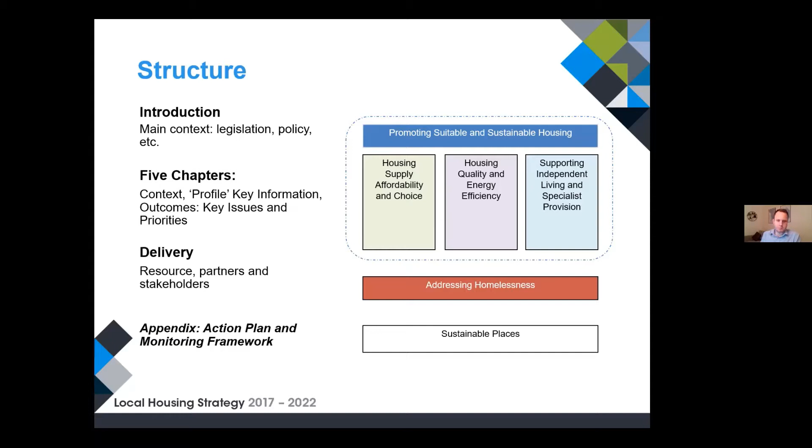But all of that is underpinned by an action plan and framework which details a lot of the actions we have to do, and I think this sets about 98 actions on the local housing strategy across those different chapters.

And there is a requirement, just like we have within the local housing strategy, there is a requirement within the local development plan to ensure there's enough provision for housing over the next 10, 15 years, based on some of the analysis we do around how many people we think want to live in South Lanarkshire and what type of people are going to live there, what type of housing they need as well. And so that's all things that we do.

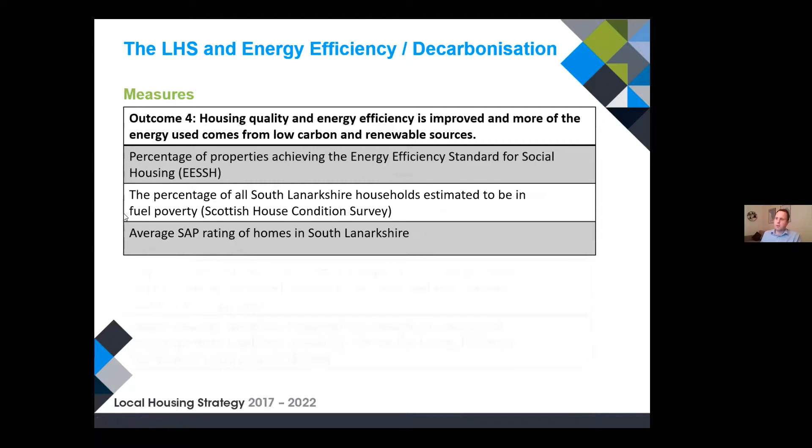So how have we intended to improve these things over the last few years? One thing we want to do with the private sector is secure maximum external funding possible to promote home energy efficiency improvements. You may have heard of the Energy Efficient Scotland Area-Based Schemes Programme - that's central government money from the Scottish Government that can be used by homeowners and private landlords to invest in their own properties. It's essentially match funding.

So if you want to put new internal insulation in, you'll see schemes that say you can do that, but they'll give you £1,000 towards it, for example. Usually you need to pay about 50%, or they'll pay a bit more for different things in different areas depending on the issues. There's a range of schemes out there, and we try to promote their availability to homeowners and private landlords.

We also work with partners to promote energy supplier comparison and switching as a means of securing best value and minimising fuel costs. We have a fuel poverty subgroup that meets every couple of months, with partners from all the advice agencies you'd expect - Home Energy Scotland, our own Money Matters advice service funded through the council, and the Citizens Advice Bureau. We sit down with them to understand the problems people are bringing to them, and make sure those people are aware of the potential solutions.

So whether it's short-term energy vouchers, which is a big thing at the moment with the increase in bills, or longer-term investment in their property, we make sure they're pointed in the right direction and work with them to allow those people to try and get out of any issues or fuel poverty risk as well.

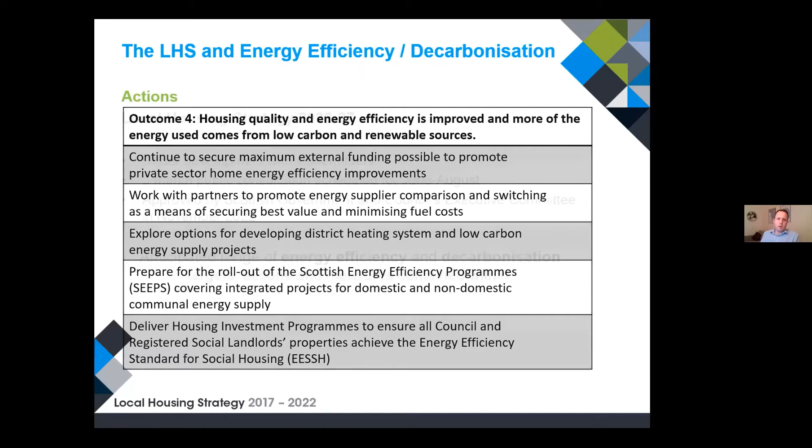The eagle-eyed of you will probably notice that it was the 2017 to 22 local housing strategy. Obviously we're sitting in 22 just now, so it's a statutory requirement that we produce another one for the next 5 years. A lot of the work I've touched upon is still underway. We had a nasty thing called COVID in the way, which put a delay on a lot of the projects we were taking forward, but there's a lot of good work done over the last 5 years, and now we need to write a new strategy for the next 5 years and really up the game in terms of energy efficiency and decarbonisation.

Targets have all changed, and I'll touch upon them in a second, but there's a lot of new technology out there, and a lot of new opportunities for the council and for owners of buildings right across South Lanarkshire. We're keen to try and get as much of that into the new strategy as possible.

So we're currently working with stakeholders at the moment, all the partners I listed at the start of the presentation, to really put a skeleton together of what this new strategy would look like.

And then it'll come to yourselves for a 3-month public consultation in June and August. I'd be more than happy, or one of my colleagues will, to come along to one of these meetings to talk through the proposed strategy and get your views on what you think would be really important to include. Then we'll send it to the Scottish Government for approval, and also to the Council's Executive Committee later in the year for final sign-off.

And then that'll allow us to work ahead against all these new targets and actions for the next 5 years. But absolutely, the chapter on energy efficiency and decarbonisation is, as you can imagine, going to ramp up quite significantly.

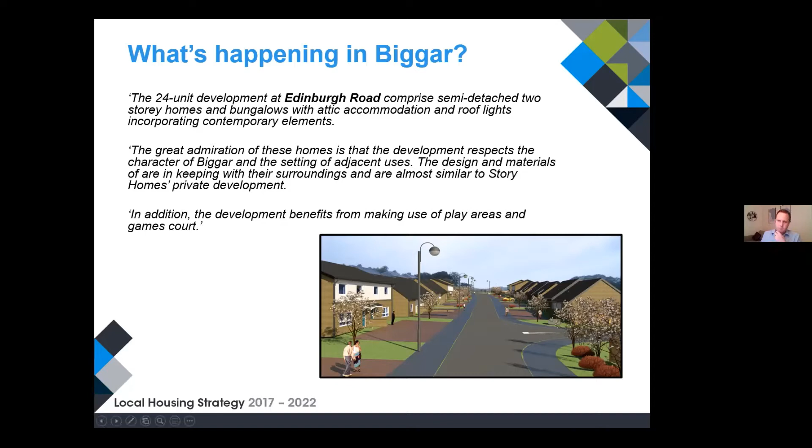The kitchens are all designed to specification for wheelchair turning space available, that kind of stuff as well. And we've got the semi-detached properties with car parking spaces available, geared up for EV charging ports as well, should the tenant need to put that in. So we've tried to make them as future-proof and energy efficient as possible, as much as our grant funding would allow. The feedback from tenants is they absolutely love them, so it's really pleasing to see that having followed that project from the start.

I think Janet touched upon it as well. Coming up in Biggar, we have Clydesdale Housing Association who've submitted plans within our strategic housing investment plan, essentially a 5-year rolling plan of where we think housing is going to be built over the next 5 to 10 years. They're planning on building a small number of properties in Biggar, and they've looked to draw down grant funding from the Scottish Government next year, ready for building for 2023.

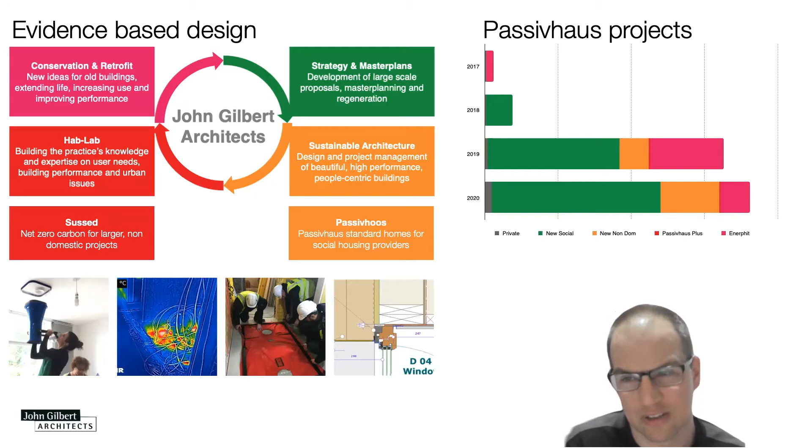So what I'm going to talk about very briefly—and it might be that Jonathan has covered some of this—is some of those principles, and then some projects and some nice pictures, because it's quite late at night. Let's see some pictures. That's what we're here for as architects, right?

So that's the plan. Just to finish off what we've been doing, we've got a partnership with Stewart and Shields Builders, doing design and build. They're building it and we're trying to get a solid cost basis, so you can give cost certainty to social housing landlords, which is really important, while building all of them to Passive House.

We've also got a joint venture with another architect, Holmes Miller, and Miller Sustainability, looking at big non-domestic buildings. So when I talk through these projects and ideas, that's within a partnership of maybe 5 or 6 companies all trying to do the same thing and help each other, which is quite an interesting thing—you learn a lot from that.

I'm not going to go through this in detail, Janet, I can send you the slides after. But COP was here last year. Scotland's meant to be zero carbon by 2045—that's a legally binding target. The UK is meant to be zero carbon by 2050—that's also legally binding.

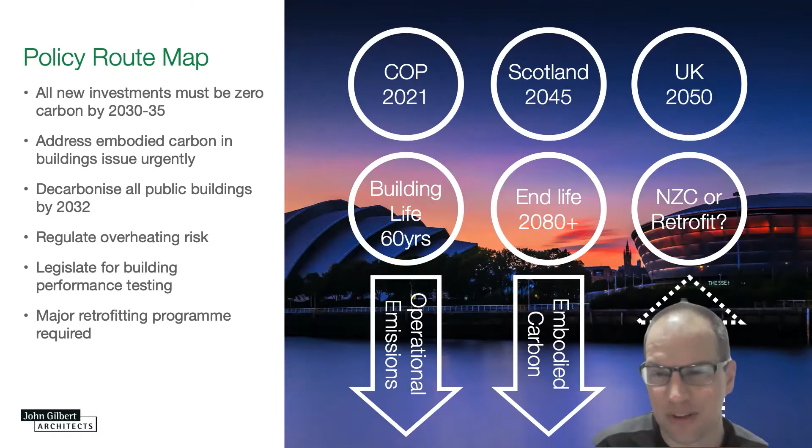And across the UK, we're using a lot more energy than we can generate in renewables.

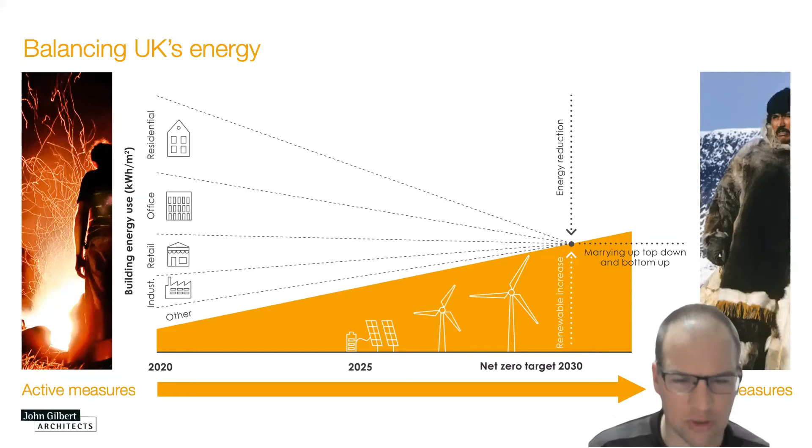So if, as a society, we want to become net zero carbon and meet all these targets, then what we've got to do is reduce the amount of energy we're using in our buildings and maximize the amount of renewables. Somewhere in the middle there's a spot where we can generate enough renewable energy and have reduced our energy down. That spot means the majority of our buildings have to be somewhere close to the passive house standard, to get to that spot. That's maybe not industrial, but certainly the residential and office.

The other thing I talked briefly about is embodied carbon. Embodied carbon is the carbon used to build the buildings we've got, and that carbon is used before the building is open. So all of your embodied carbon in your bricks, your concrete, your steel - the day the building opens, you've already spent that carbon. Then the operational carbon is everything that comes from the heating. So a typical building regulations house, on the left-hand side, 67% of it is operational carbon - the running, the energy from heating and hot water. Only 21% of it is embodied carbon, so it's not a very big fraction.

If you go to something like a passive house, the amount of carbon is much smaller, but only 23% of it is for the heating and hot water. 50%, or more than 50%, 60% in some cases, is actually building the buildings. So you've spent all that carbon before anyone's actually moved in, which becomes a really big issue. Embodied carbon is one of the big blind spots of the construction industry because no one's measuring it, no one's monitoring it, there's no regulations for it.

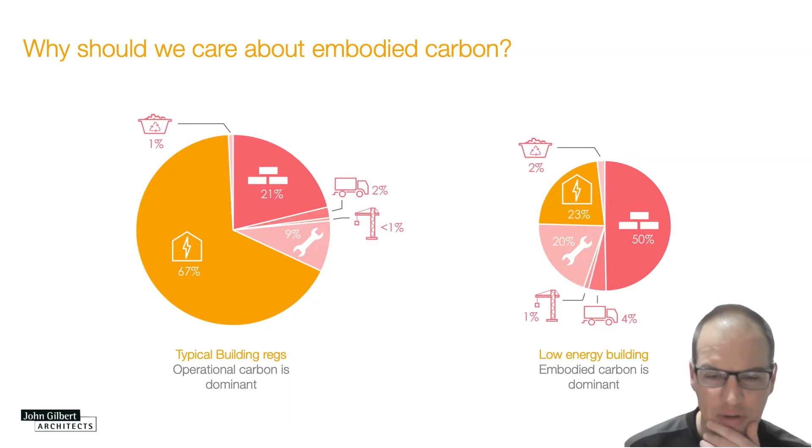So that gives you a bit about the policy, a bit about the ideas. How do we achieve these net zero carbon houses? Well, we've got to reduce our operational energy. We've got to insulate things. We've got to make things more airtight. We've got to put some efficient heating in.

And Jonathan was talking about heat pumps - heat pumps, electric, that kind of thing. Got to be careful that by doing these two things, we don't create a whole load of health issues by sealing buildings up. So we've got to get some ventilation in there - that's really important. Ventilation can be a massive loss of energy. Some building regs houses we've looked at, maybe 35% of the heat has been lost through infiltration and the lack of airtightness in the building. So you're getting ventilation, but the cost of it is really a lot of energy, and that's a real problem.

If you've got a really efficient heating system and you reduce things down in a passive house, then actually your hot water demand becomes the biggest demand. And so getting good hot water is important.

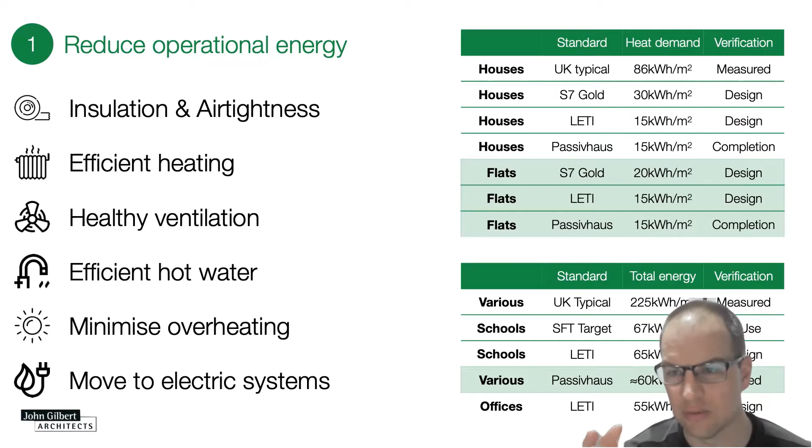Scotland and the UK is heating up, and if you've got well-insulated buildings, then you've got a risk of overheating. So you've got to make sure you design for that and think about it. And there's a move to electric systems. I'm not going to talk through all the stuff on the right-hand side, but the upshot of all of that is that all of the research on where we need to be to meet our net zero carbon targets comes down to being around the same targets as passive house, give or take. That's where the UK's building stock has got to be.

So what is passive house? What does it do? It does all these things. Every single thing on here is backed up by 3 or 4 different academic studies showing that passive house buildings do better than building regulations buildings in all of these criteria. The big one for me is around fuel poverty - eliminating fuel poverty, which leads to low rent arrears, which leads to social housing tenants having more money in their pocket.

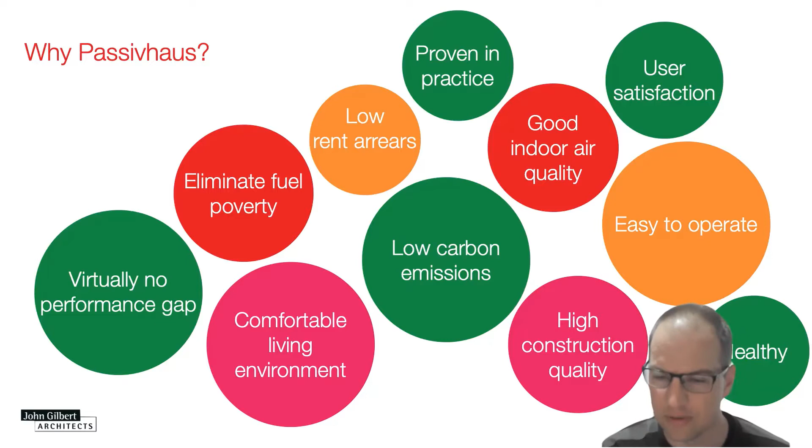And I think that's a really important social aspiration. I'm going to talk a lot about tech stuff, but the idea that people are choosing between things - I've got a real bee in my bonnet about the fact that fuel poverty is a political issue. It's not a technical issue. We can technically build houses that mean people don't need to be in fuel poverty, and we're not. That's a political issue to my mind. But anyway - comfortable living environment, low carbon emissions, construction quality, and so on.

I'll say very quickly on this. Passive house is three things. It's a certified building performance standard, and behind that, there's a calculation to work out how much energy your building is using. You don't need to meet the performance standard in order to use the calculation.

We use the calculation on a wide range of buildings to see what the energy performance is, and it's often very close to what the calculation suggests, even for non-passive house buildings, which is interesting. With EPCs, we often find a gap between what that predicts and what it actually is, but we find it much closer in the passive house calculation. And then you can get certified components, like passive house windows, and I'm a passive house person, so that's great.

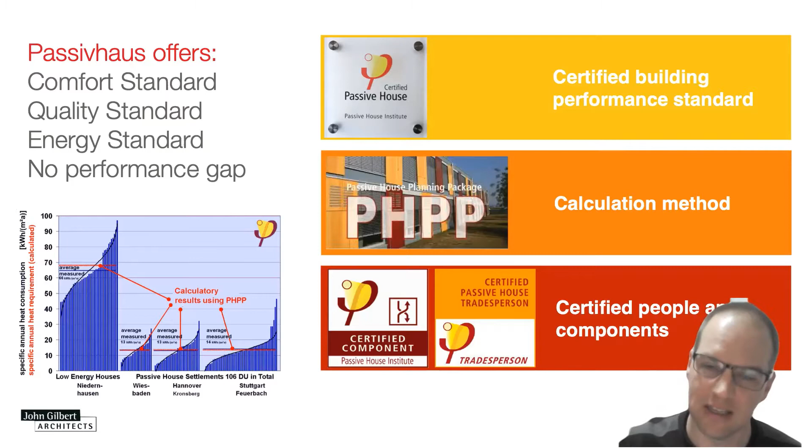That can help you get to the certified building standard, and you could do it for a whole range of buildings. So we're working on all of these types of buildings at the moment. Housing, as I say, we've done social housing, there's private housing, we've done private housing.

Schools, we're looking at six schools across the UK to passive house standard. Retrofit, so we're retrofitting a tenement, a traditional sandstone tenement in Glasgow to passive house standards at the moment. It might not be the way that we do all the tenements, it's really complicated, but it might teach us some things that we can put into other projects. We're doing a swimming pool in Blairgowrie and offices and other, a rowing club and other different things. It's quite good.

Passive house is basically about human comfort, about how people perceive comfort. I've got a little bit of spiel about this, but time's pretty short, so I'm not going to go through it. But if you want that, I'm quite happy to. There's videos on our website and things like that. But it's all about how your body is comfortable at as low a room temperature as possible, and how we get that energy efficiency from that. It's about being comfortable.

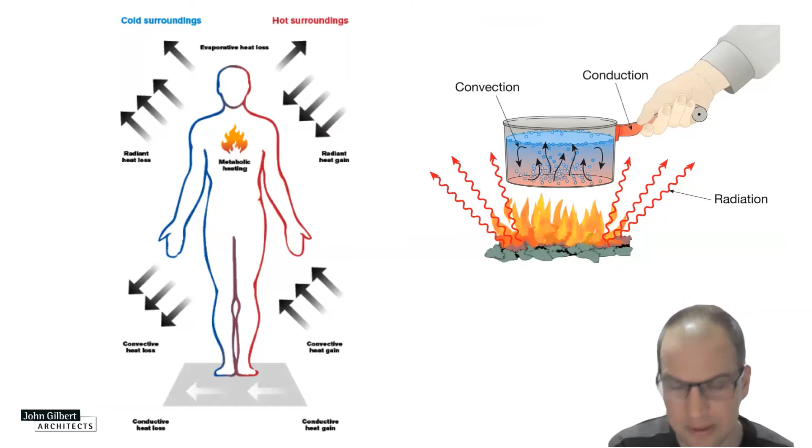And it's about building physics. This is what it means for a building: you have a lot of insulation, which you would expect, but you also have triple glazed windows, not just for the energy side of things, but they also help people feel comfortable in a room. A single glazed window makes you feel cold, or can make you feel cold. A triple glazed window can keep you warm.

It means that if you have all the surfaces in a room at the same temperature, then people will be happier with a lower air temperature, which is quite interesting. So passive houses are typically heated to 0.5 or 1 degree cooler than a building regs house, but people feel more comfortable, which is an interesting thing. Triple glazing,

we're looking at the sun. We're trying to design for passive solar gain, but trying not to get it to overheat in the summer. We're making the whole building airtight, so we're not getting the drafts. Because we made it airtight, we're going to put in a good ventilation system, and that ventilation system is going to recover the heat from the stale outgoing air and put that heat into the fresh incoming air. So you've always got fresh air coming in, but you're keeping the heat in the house.

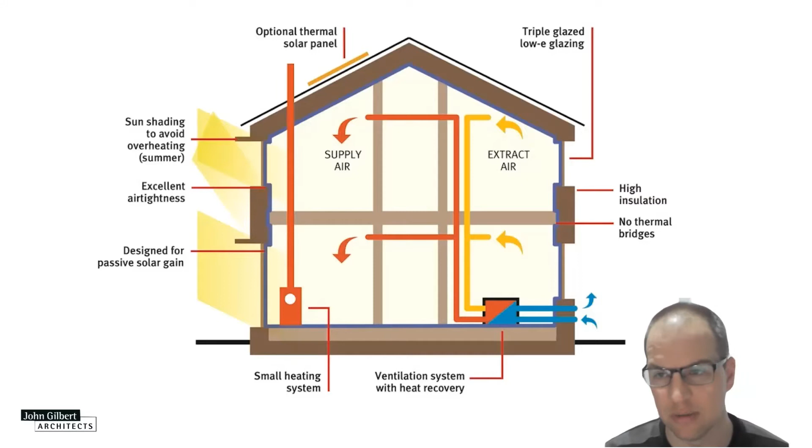And if you do all that in Scotland, you only need a really small heating system to keep all that going. The big issue for the heating system, frankly, is hot water. Where do you get your hot water from? Most of our heating systems are sized for the hot water demand and not for the heating demand, which is an interesting thing.

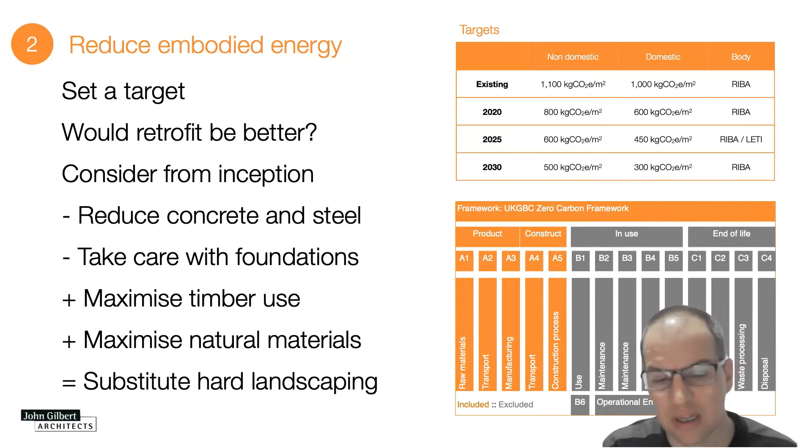Once you've reduced your operational energy, thinking about embodied energy, thinking about retrofitting, thinking about reducing concrete, reducing steel, maximizing timber, looking at local materials and things like that.

This gives us an idea of how we calculate and think about that. We look at big volume things, like the structure. We look at things that are really heavy, like the foundations. And we look at the things that have got a lot of carbon in them, like steel and copper and things like that, and we look to reduce all of them down and swap them for more natural options.

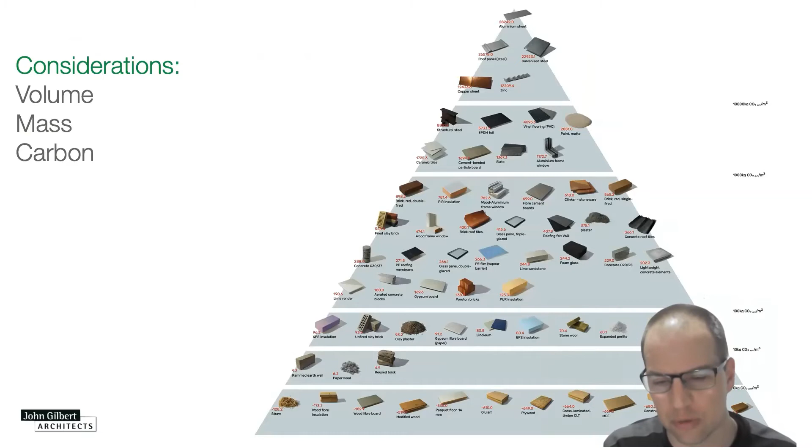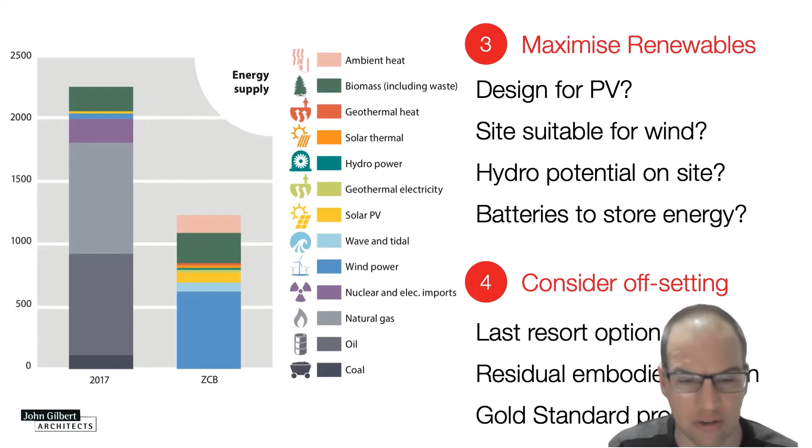I would suggest that only when you've done the first two things should you be thinking about putting PV on, and should you be designing for renewables. I think you shouldn't be doing that until you've reduced your operational energy and your embodied carbon as much as possible. And as a last resort, particularly in public projects at the moment, only after you've done all that and maximized the amount of PV should you even consider offsetting and paying for trees in sub-Sahara or wherever all these offsetting schemes are. You only do that after you've done all the other things.

And then there's some future-proofing things, thinking about peak energy demand, electric vehicles, behavior change, fossil-free heating and hot water. Jonathan mentioned gas is being phased out, but there are other issues around that. Water-saving measures, especially hot water, because hot water is going to become the big demand. If you can use less of it, that's great. And monitor it, and learn from that.

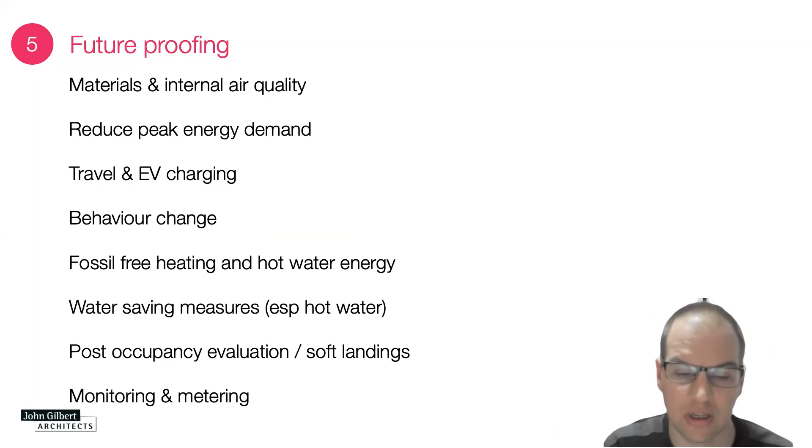This is a little diagram I'll talk about quickly, because there's a big move towards electric systems, and there's talk about hydrogen. You can see down here, hydrogen versus electric. I really think that as a society, we need to be looking for the most efficient use of the energy we've got. The diagram on the left shows that about two thirds of the energy taken out of the ground or out of the sky in the United States is wasted in inefficiency.

Motors are not 100% efficient, transmission is not 100% efficient, and when you add that up, two thirds of the energy is wasted, and only a third is used for a useful thing. This little diagram with the car says exactly the same thing. If you have the same amount of primary energy dug out of the ground or generated from a wind turbine, how far does a combustion engine car go versus an electric car? The answer is an electric car goes twice as far with that same amount of energy.

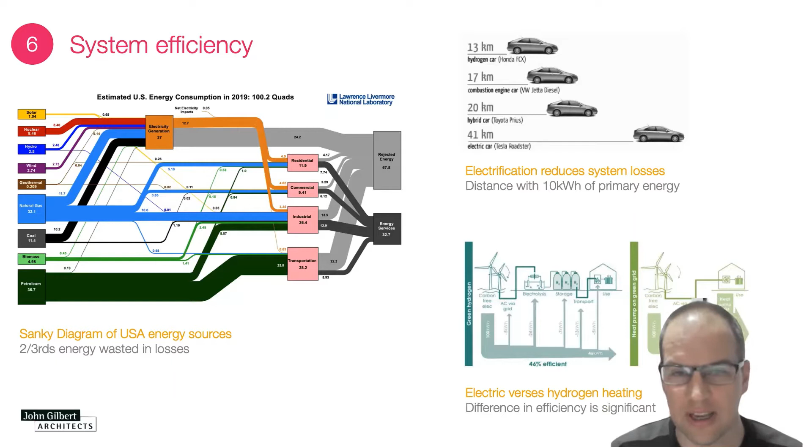So as a society, if we move to more electric systems that are more efficient, we will get more out of our renewables. Whereas if we convert it to hydrogen or something else, we end up with inefficiencies and have to generate more to heat our homes. So that is about moving to electric. I think I've talked enough tech stuff, and I apologize for that, but I do think it's important as a background to some of our projects.

So the first one is now maybe 12 years old, up in the Highlands. This is 2 houses for social rent on a brownfield site for key workers. The land was owned by the Forestry Commission. This was built to a pretty decent energy standard, we looked at the standard, which was pretty good for the time - Code for Sustainable Homes level 4, if anyone remembers that.

One of the things we did here was really investigate Scottish timber. The majority of the timber in this project is sourced within about 50 miles of the project. Again, it's a social housing project, not a niche private project - this was all built to a budget. So the timber kit is all Scottish timber. It's Scottish larch clad in, and there's Douglas fir in there as well.

The windows came from Norway and their timber - that was a bit of a shame. And we got wood fiber insulation, but that's not made in the UK, so that came from Germany. But other than that, it's all good Scottish timber. The thing about that was, it got started - it's part of this path about thinking about embodied carbon and where our materials come from, and what can we do for the rural economy by making use of the resources Scotland's got.

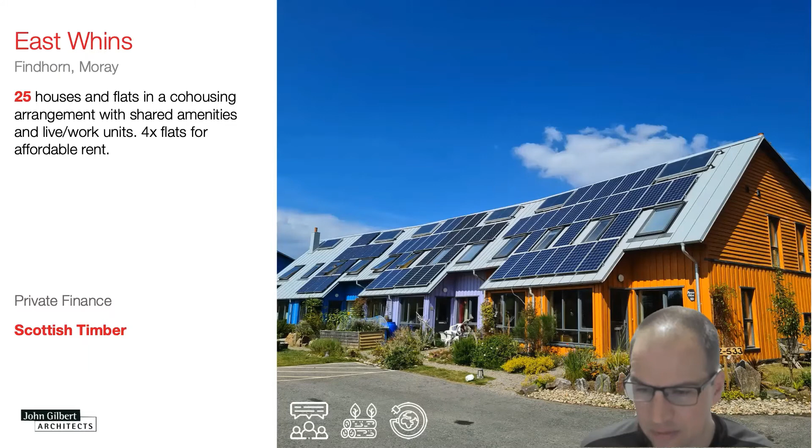And we designed all the roofs for PV. So it's that whole thing of reducing the operational energy, reducing the embodied energy, and the next thing is to look at PV. So the whole development is designed around PV, and there's also solar water heating on there for the hot water. As you can see, these are solar water and these are PV panels. So yeah, quite like them. That's good.

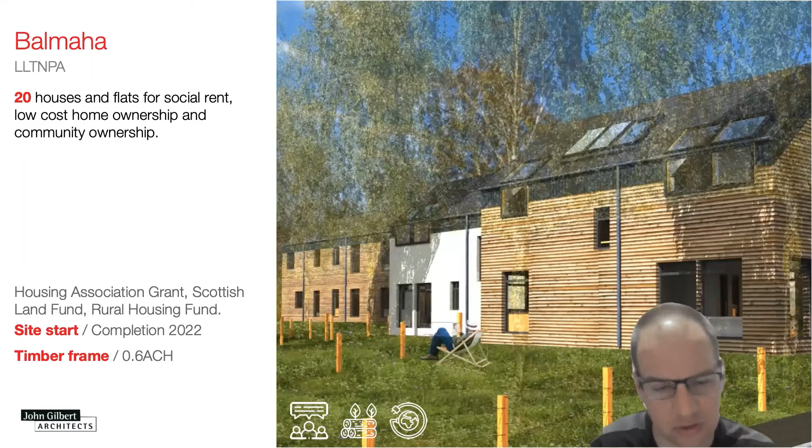Balmaha, we're just hopefully going on site with that shortly. That's 20 houses for a social housing provider, but again, it's the same kind of ethos, looking at Scottish timber, looking at local resources and so on.

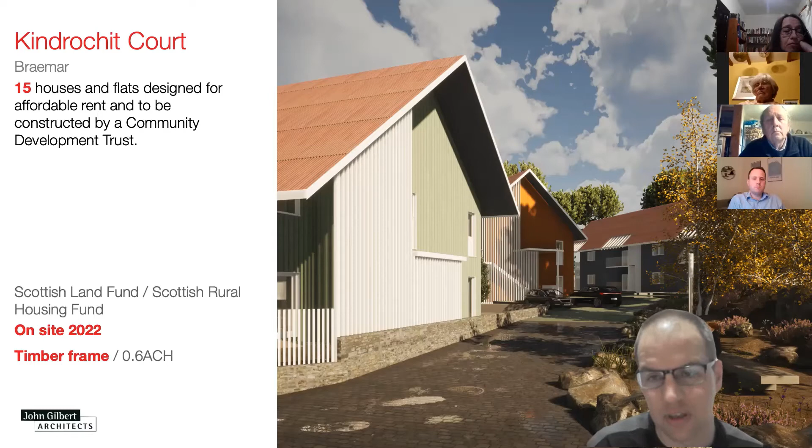We're hoping to get planning for this very soon. The planning process has been pretty tortuous, but it's 15 houses and flats, and the community wants this to be local timber. We've calculated the embodied carbon.

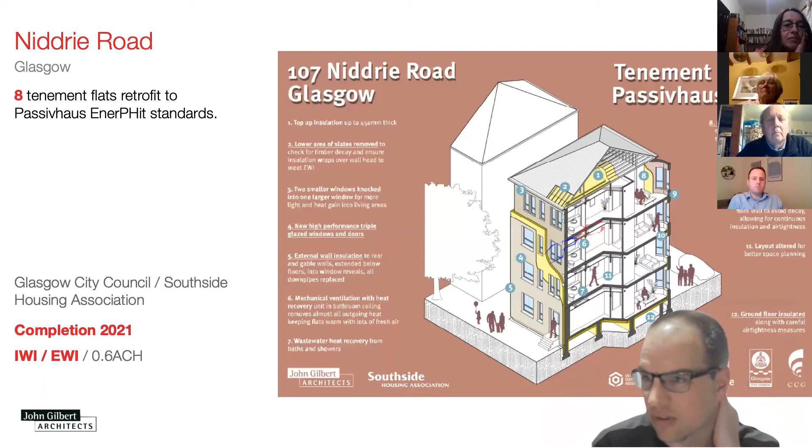And that leads us onto Niddrie Road, which is this tenement we're refurbishing to Passive House standards. I'm probably close to running out of time, so I'll skip through a couple of other things - nice pictures of schools. You don't need to know about the schools, but they're Passive House, really low embodied energy and embodied carbon, and these are all due on site in the next 12 months.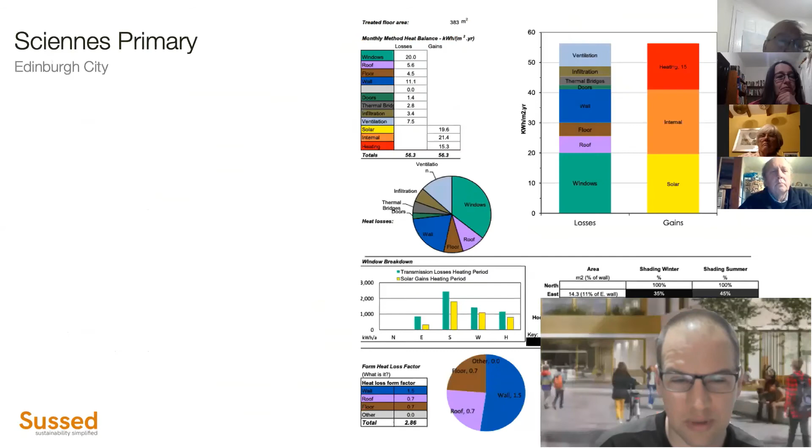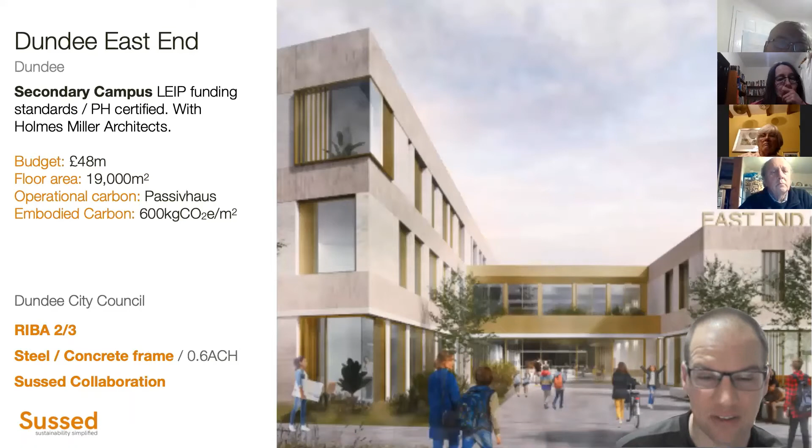School, brilliant, great. And we're just looking at a big project in Dundee for a new secondary campus school, which is really massive, like unbelievably massive, which is really complicated as well. And we're also looking at some schools in the Highlands, which is quite nice, very rural.

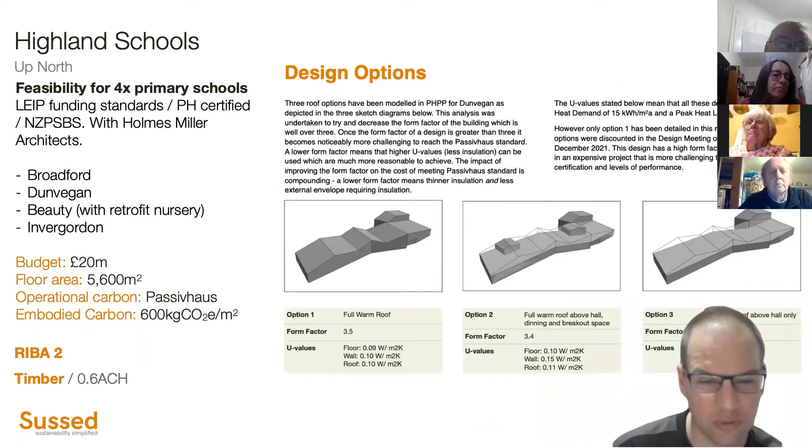I'm going to skip all of these because we've talked about retrofit, and just say, I hope that's been interesting, and I welcome any discussion, but thank you very much for your time.

Oh, that was really impressive, Jonathan. I just read through - we put in a response to the Council's Sustainability and Climate Change Strategy, which I'm not sure whether they'd even talked to you about, because all of these things you've mentioned were completely missing from it, which seemed odd, but it's very reassuring to know that you have got a lot of these things in hand.

One of the questions I had is about parts of bigger or older houses in the conservation area, and how realistic do you think it will be to get those sort of houses up to band C level? Because you can do bits and pieces - I've got solar panels on my house, but what I really need to do is insulate the walls, and that's quite a big messy job. It's not something that's glamorous, so there are challenges of older houses and how to deal with them.

Yeah, no, it's a very valid point. On the first point, we do work with colleagues. So what sits between the Sustainable Development Climate Change Strategy and the likes of the LHS is a bit like that - they have an action plan that sits behind it, which covers all the things that the different council resources and partners are going to put in to try and drive that strategy forward.